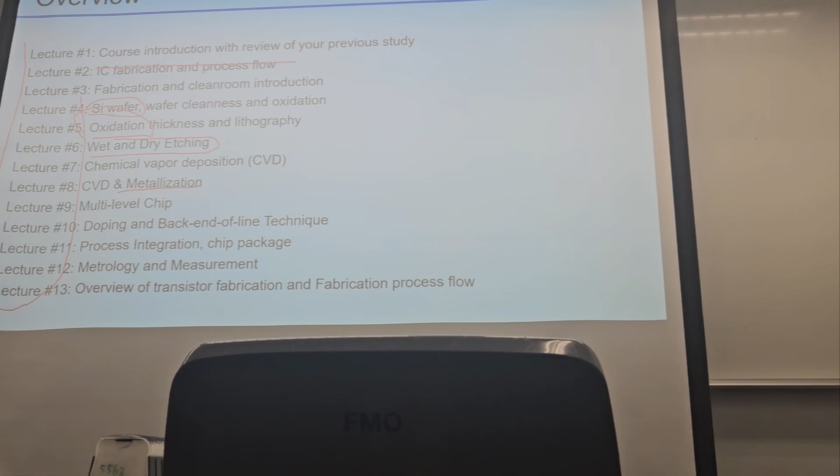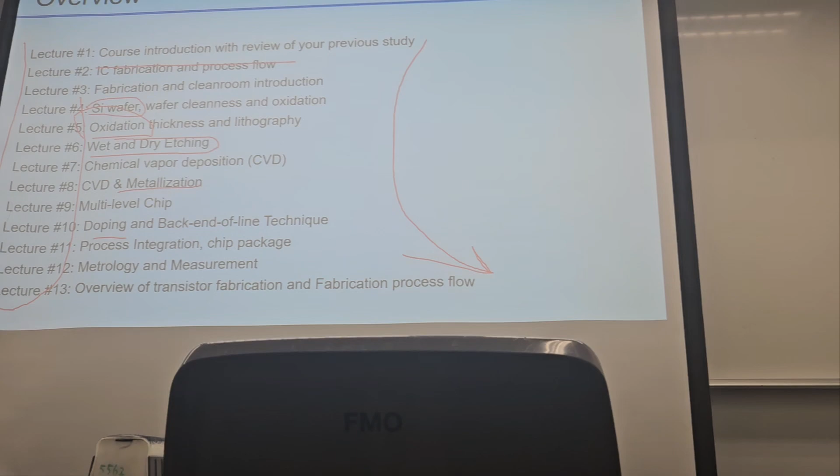We also have questions covering CVD, and yes, we have questions on metallization, multi-level chips, doping, and back end of line technology. So all the items listed here will be covered by the final exam. Okay, so the good thing is that you have sufficient time to prepare for the final exam. I think our final exam should be the last one of the final exams.

It's scheduled on May 29th. I think this is a Tuesday, afternoon from 4:30 p.m. So 2 hours, and the loading actually is not heavy. And room 2464. Before the exam, please check the SIS system to make sure if there's any change of the room. Different from your in-lecture quiz, the final exam will be closed book.

So there are several tips for you to prepare. The first thing is that in these slides, I added all the questions and the corresponding answers of the in-lecture quizzes. So please read and remember all these quizzes. And behind each quiz, you need to understand it and learn the fundamental knowledge. And our final exam will also cover the questions in the lab sheet and also the lecture notes.

It is closed book. You cannot use your laptop, your mobile phone, iPad, or any other equipment. And academic integrity is, I think, the highest priority. You are not junior students, and I believe all of you know about it. And you need to prepare pencils, erasers, and rulers, because you need to draw the cross-section view and also the fabrication process. And if you need, to be honest, I think we do not have complex calculation, but you can bring a simple calculator.

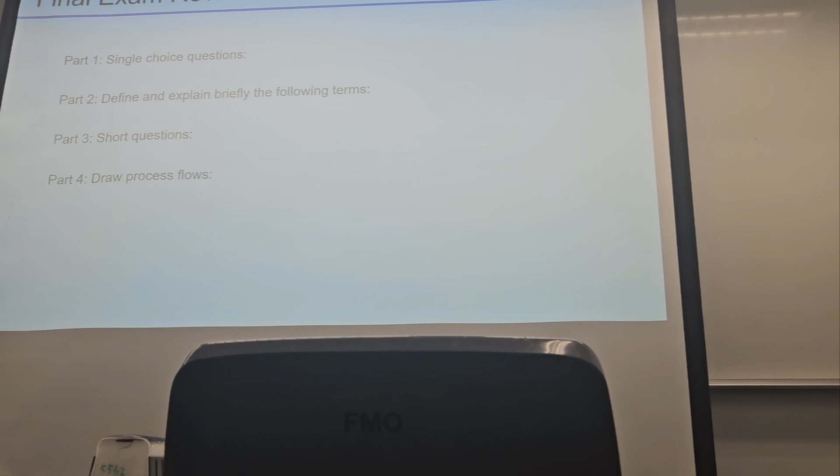Sorry, I think here is wrong. There's no multiple choice in the final exam. Sorry, I will update the slides later. So part 1 is single choice questions, different from your in-lecture quizzes, which have multiple choices. And part 2 is define and explain briefly the following terms. So you need to understand the terms in IC fabrication. You need to remember. Okay, and we also have short questions, which are also very similar to the in-lecture quizzes.

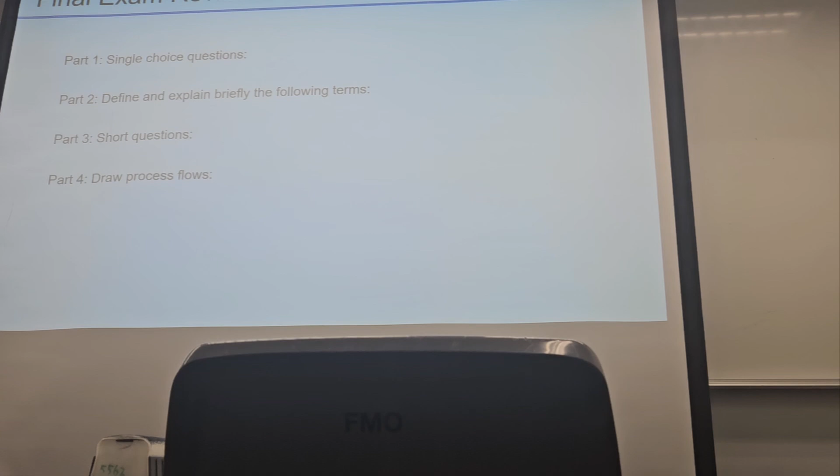And the last part will ask you to draw the process flow, which needs your understanding of IC fabrication, and also you need to understand the top view and the cross section. So I think in lab report 5, most of you misunderstood the cross section.

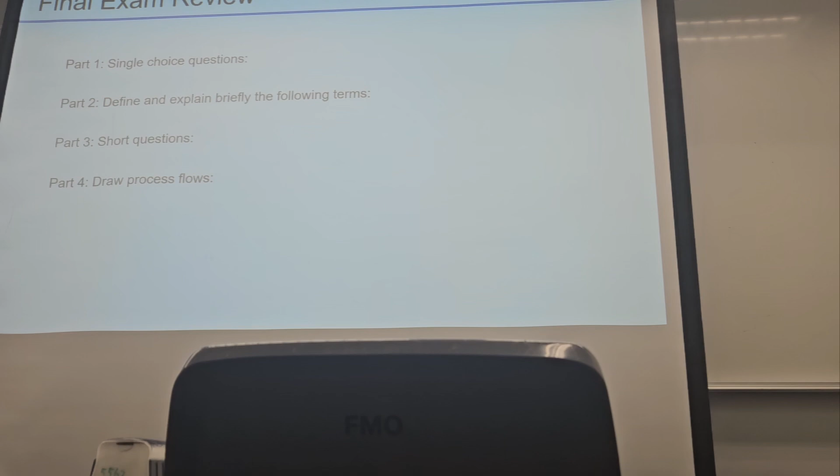Okay, so for part 1, we are going to review the in-lecture quizzes, so you will understand what single choice questions are. So in the following part, we can start from part 2. Okay, and here I think we can do a dry run, right? So here I put the items. You can think about whether you can still wake up your memory or not. Okay, so now you can still check the slides, but in the final exam you need to make sure you remember the details. For example, the first one, what is electromigration?

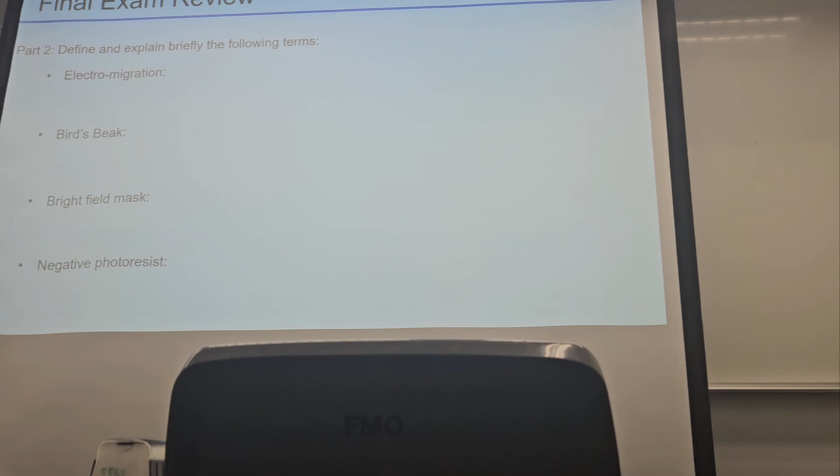For this part, I think we did discuss this in the lecture for the metallization, right? And we also discussed the method to suppress electromigration. Okay. So it is related to the current flow. When metal carries large current density, which refers to the large current flow, the motion of electrons hitting the metal core ions leads to ion motion and causes voids or hillocks.

Well, you do not need to be so professional, but at least you need to write down that under the large current flow or large current density, the atoms of the metal will move from one place to another. Right? You can make the answer simple, but it must match the key point. Okay? So electromigration.

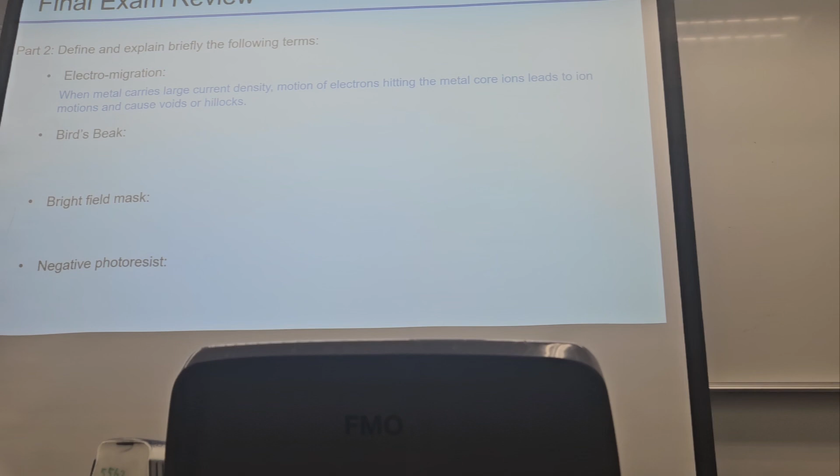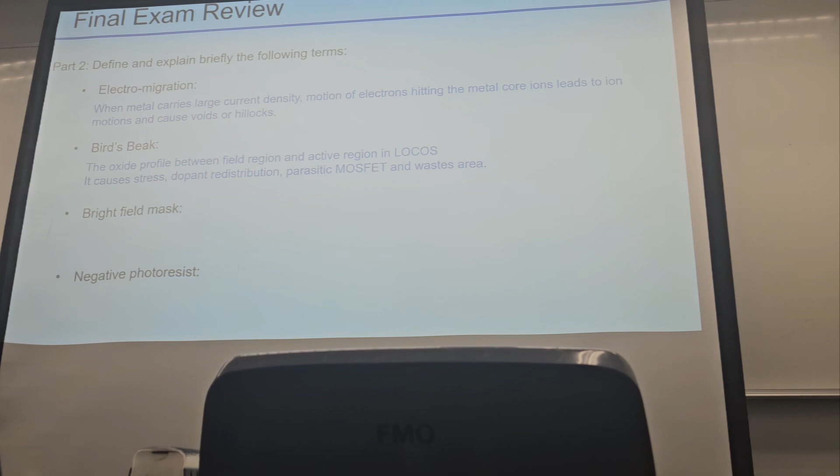The second is bird's beak. I think we discussed this many times in the lecture and also in the lecture quizzes. Right? So what is bird's beak? It is a phenomenon in the oxidation process, right? In the local oxidation of silicon, we need to use the nitride hard mask to protect the area where you do not want to grow silicon dioxide.

So what is the bird's beak? That is the profile, right? The profile of the grown silicon dioxide between the field region and the active region in the local oxidation of silicon. And in part 2, you may also be asked what is LOCOS. You need to understand the following, right? LOCOS is a very professional term in IC fabrication. And definitely you can discuss the drawbacks, the limitations, the issues coming from the fabrication.

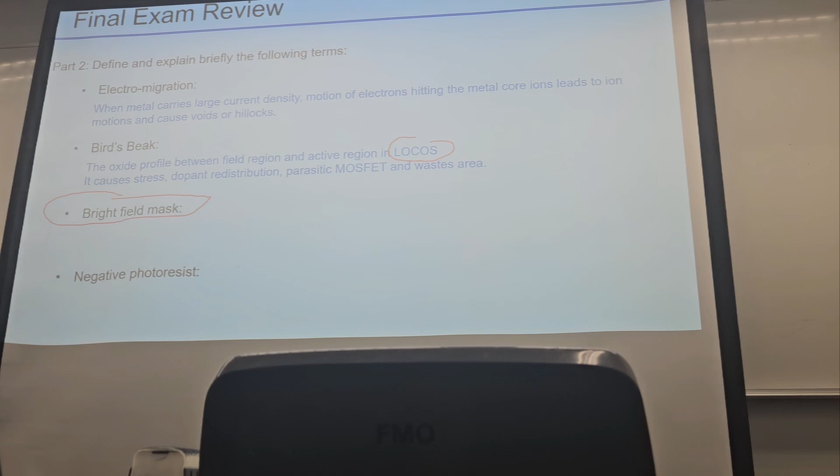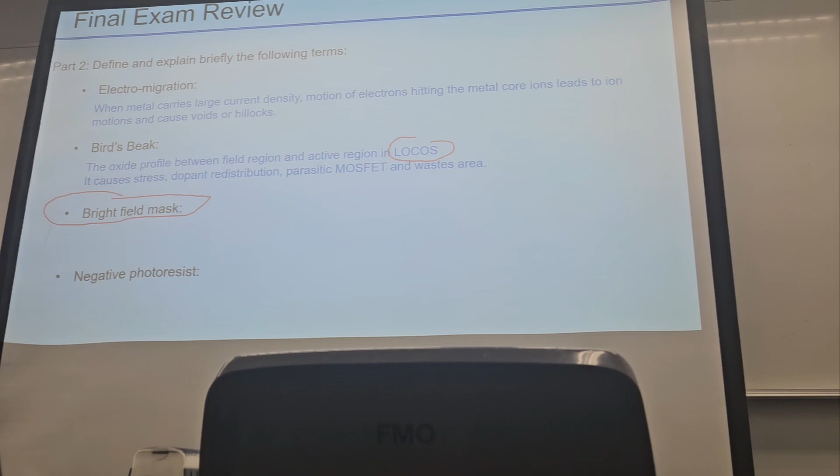Okay? So next, I think part 2 of the final exam will also cover the types of mask. I think more than 50% of you answered the question in the lab report in the wrong way. So you need to understand what is the bright field mask and what is the dark field mask. The field here refers to the area outside the pattern, not the pattern itself. So the bright field mask refers to the type of mask where the patterned regions are non-transparent.

So you can see the opposite situation, right? The transparent and the non-transparent. So for the dark field mask, the patterned regions are transparent, right? They are bright. So I think you need to understand the definition.

And we also discussed types of photoresist. You need to understand the definition or difference between the negative and the positive photoresist. Okay? I can give you half a minute to think about the difference. I think today we want to show you different types of questions. We also want to wake up your memory. We're going to have more than 20 questions, so you need to make sure you can have a quick wake-up of the memory.

Right. For the PR, we have two types, positive and negative. The positive PR refers to the type that, after reacting with the UV light, can be removed by the development. While the negative PR is the opposite, right, after reaction with the UV light it remains on the wafer after the development. So here, the unexposed part will be dissolved or removed during the development, right? And the exposed part remains.

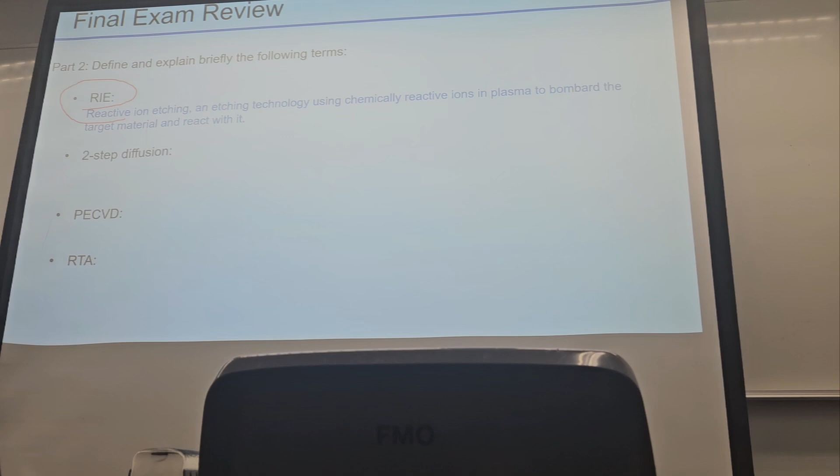Okay, so in addition to RIE, we also have ICP, right? Here, this I is not the ion. This I refers to inductive, okay, inductively coupled plasma.

And we also discussed the two-step diffusion. So when you look at the two-step diffusion, you should wake up your memory that we discussed ion implantation and diffusion. And then you need to understand the difference between diffusion and implantation. Right? Actually, implantation also has several steps. For diffusion, the reason why we have two-step diffusion is because we want to control the amount of dopants, which we have covered in the lecture and also in the lecture quizzes.

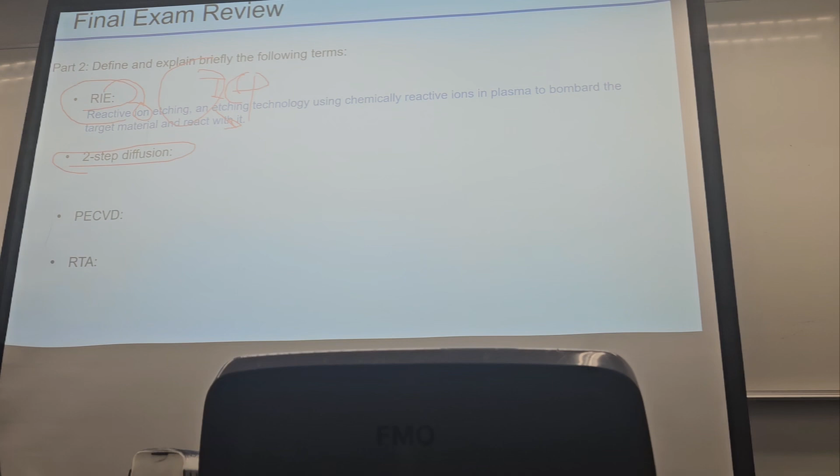So, what is two-step diffusion? We have the pre-deposition to introduce a certain amount of dopant to the top surface of the wafer. And then we have the second step, we call it drive-in, to diffuse a certain amount of dopant into the wafer. Okay, so here I just show you some examples, and also let you understand the difficulty level of the final exam.

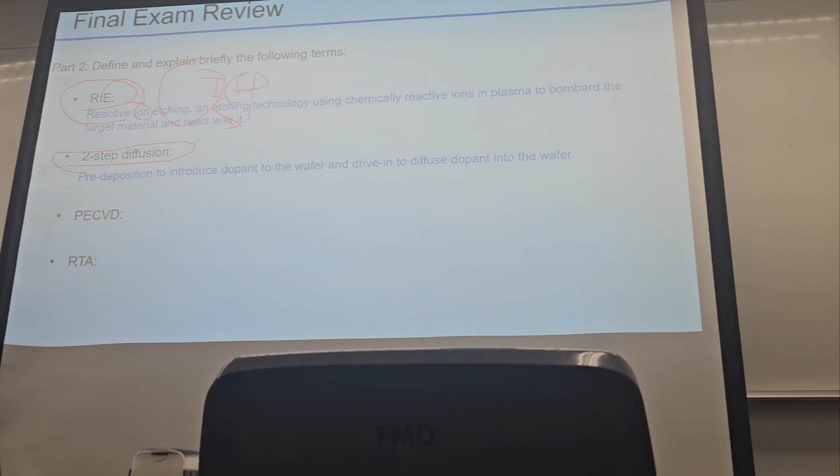So for PECVD, you need to understand the full name of PECVD. In addition to PECVD, we also have LPCVD. So what is PECVD? Think about it. Okay. Try to wake up your memory. You have to try now, then you will understand the effort you need to put into the final exam. Okay.

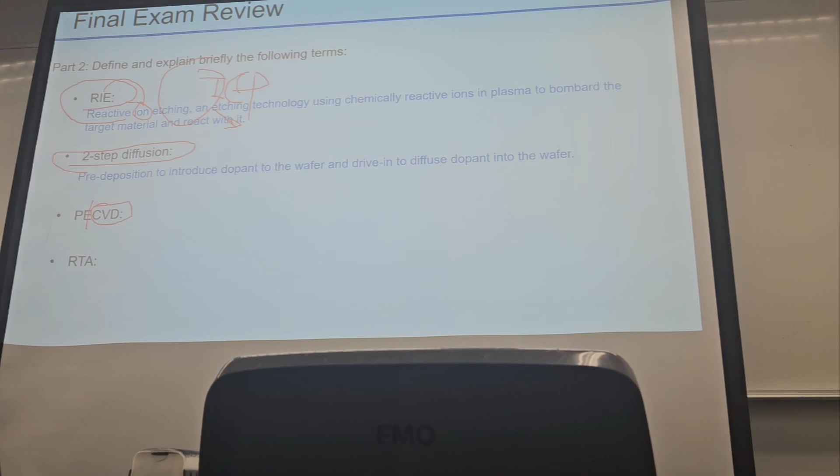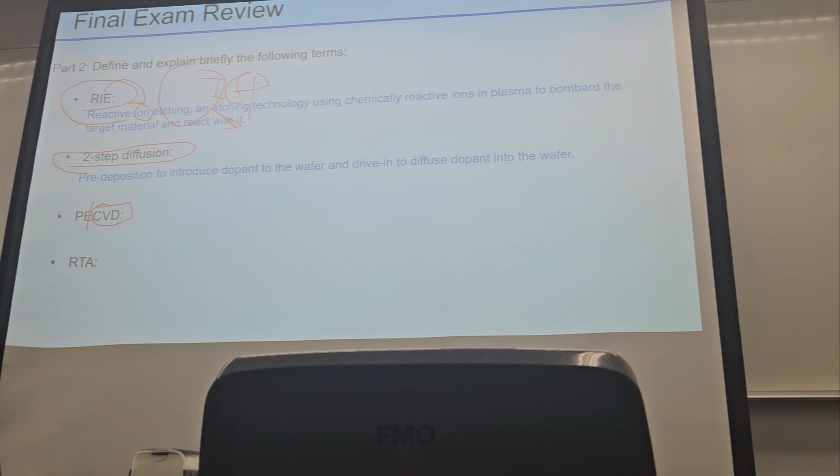So here you can see, then you need to wake up your memory for the CVD, right? And the CVD is for the material growing. So for the material growing, we have different types in addition to the oxidation. For here, you need to understand the difference between oxidation and CVD. Right? Oxidation needs to consume the silicon, while CVD is going to consume the gases without consuming the substrate.

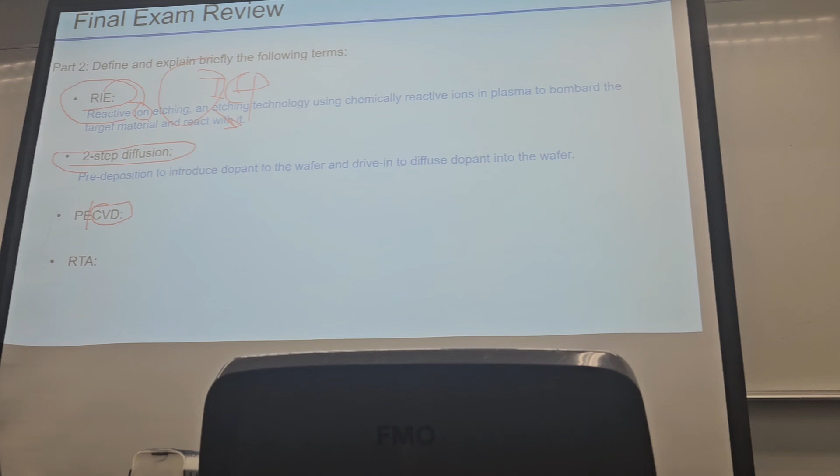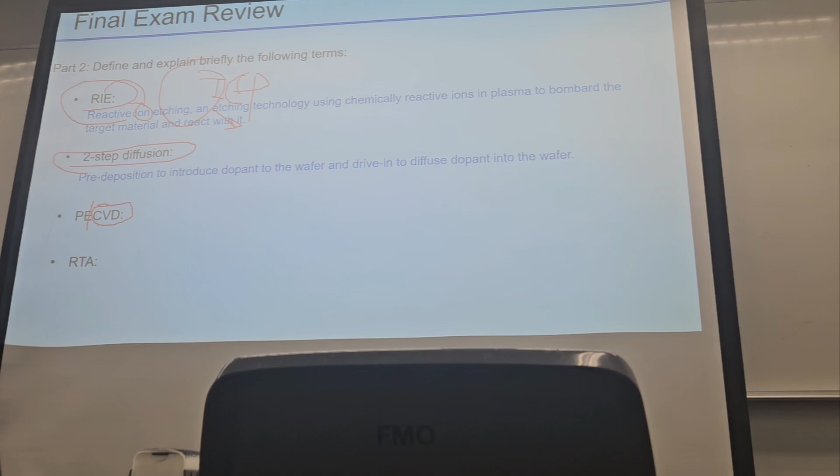So then we have different types under different pressure and temperature. So the PECVD is for the low temperature, below 350 degrees C. Then how to enhance the reaction? We use plasma. So the PE stands for plasma-enhanced CVD. Right? We also have LPCVD, the low pressure CVD, based on the high temperature. When the pressure is low, we need the high temperature to activate, to give the energy, contribute to the reaction.

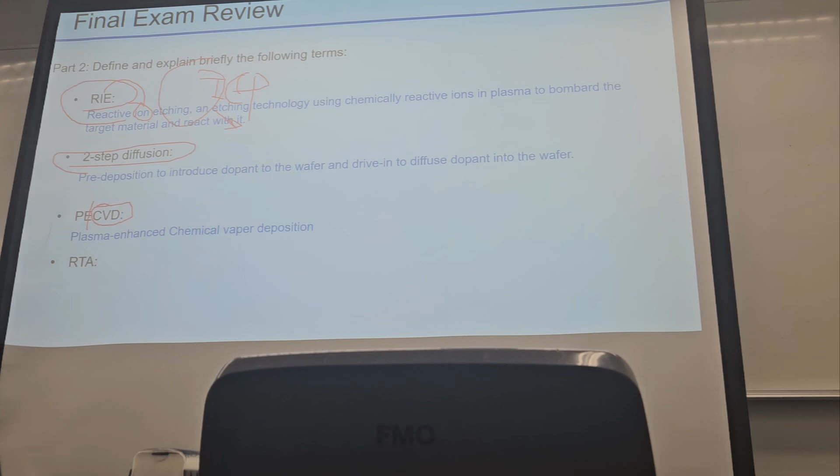Right, so then you need to write down the full name, plasma-enhanced chemical vapor deposition. And we also have discussed RTA, the rapid thermal annealing. So you also need to understand the full name and understand the purpose of this kind of equipment.

Okay, so the silicide. Think about it. What is the silicide? You can wake up your memory around the metallization. Two weeks ago we discussed the silicide. If you cannot wake up your memory, then please read the slides before the final exam.

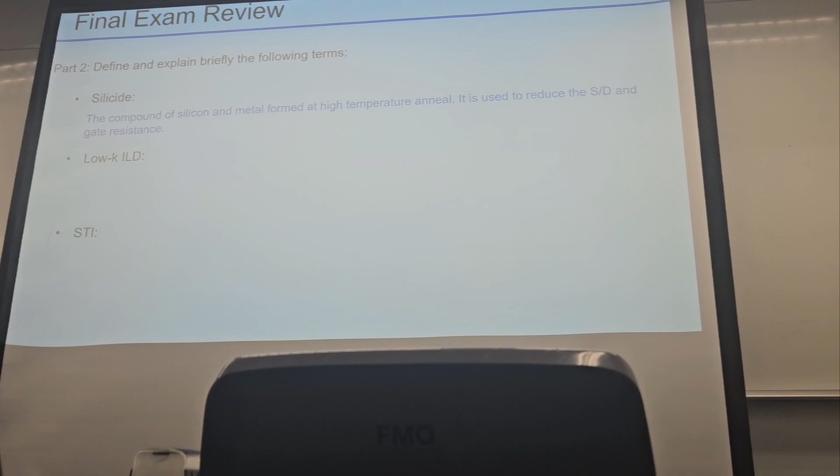So it is a compound of silicon and a metal formed at a high temperature annealing. So it helps to reduce the source and drain and the gate resistance. Okay, and also it can help us to suppress some other negative effects, including the migration. Okay, silicide. I think we discussed this in the lecture for the metallization.

Okay, so what is the low-K ILD? So in the IC fabrication, in the IC devices, you need to understand what is the K. I think we discussed this. The K stands for the dielectric constant. So low K and high K. So what is the dielectric constant? I think you must have learned it in your previous physics courses.

It is used to characterize the capability in storing the energy. So in other words, the dielectric constant can help you to calculate the capacitance of a certain structure. Right? So if we have a capacitor, top and bottom electrodes, with the material inside, the material between the two metals will help you to determine the capacitance of this capacitor. The same situation in IC fabrication, right? Or in the IC transistor devices.

In the transistor, we have multiple electrodes, right, to form the source, the drain, and the gate terminals. And these electrodes can form the capacitor, giving the capacitance, working as parasitic branches in the equivalent circuit. So if we can decrease the dielectric constant of the capacitor, we can decrease the capacitance, and then decrease the parasitic effect. Okay? So here, the low dielectric constant in the interlevel dielectric.

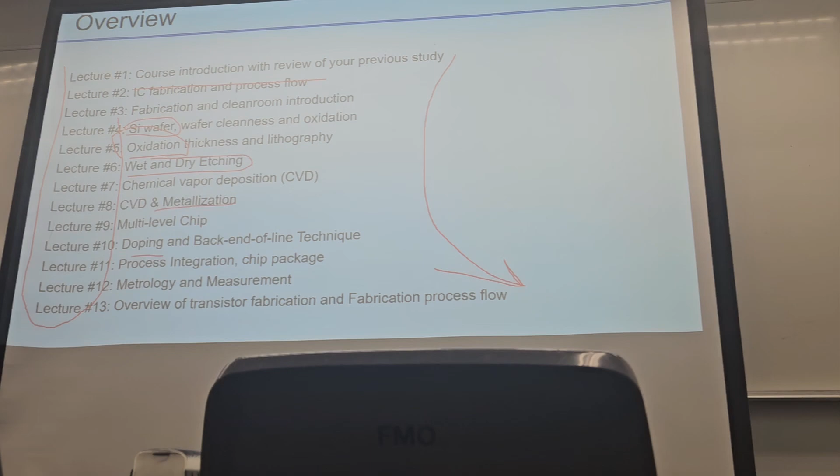Okay, so this is part 2, and you can see that all these terms are covered by the topics listed here. So please go through the slides before the final exam. I think 1 week should be sufficient for you to read all the slides. After 2 weeks, you may forget what you learned on the first day. Okay, so 1 week should be sufficient.

Okay, so is part 2 the definition questions? Yes, the definition questions. Give me a word to explain. Yes, correct. To be honest, there are not too many terms there. We have how many lectures? 13 lectures, right? Each lecture maybe 2 or 3 terms. And you can do the summary.

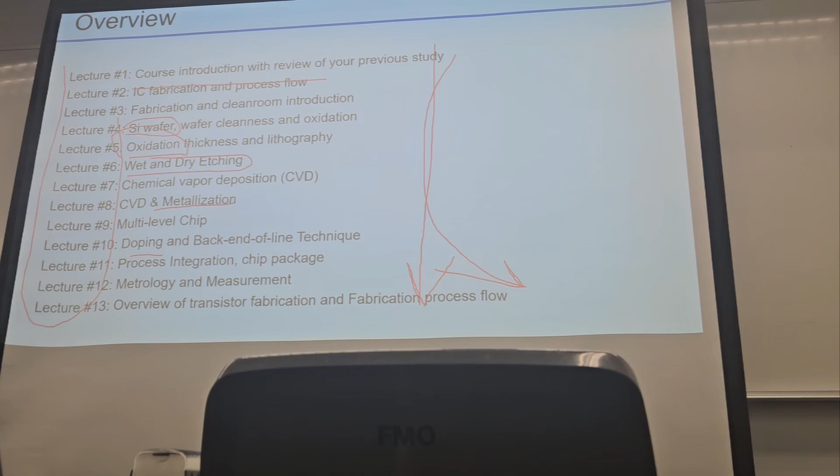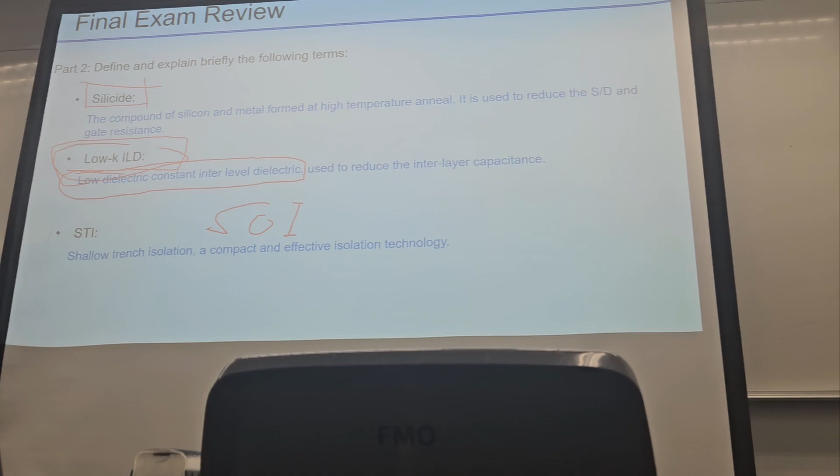It's very important to remember these terms after learning the IC fabrication. Otherwise, in the communication, there are too many words without these terms. We only have to briefly describe the function? Yes, in 1 or 2 sentences. Or if it is so hard for you to explain the full name, for example STI, you know it is for isolation, but you cannot remember what the S stands for. Then you can say, okay, this isolation method uses the trench or the etching method to create isolation between traces. You also can get the point.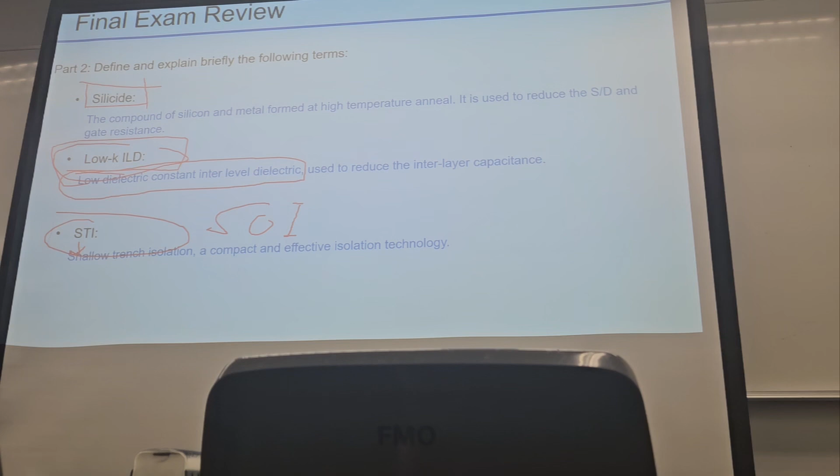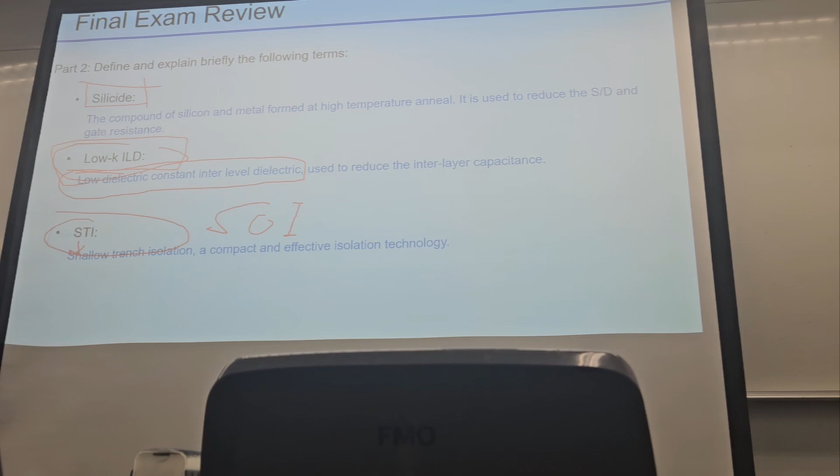Is the answer written in the PowerPoint enough for us to write in the real exam? Is this number of sentences fine for us to write in the exam to get full marks? If you can provide related information, you can get partial points. For example, if you forget the shallow trench, then you can say this is a compact and effective isolation technology. Then you can also get points. Okay.

Okay, so part 3 is based on short questions, right? So it's not to explain the terms, but to answer some questions. For example, the traditional question is to understand the doping type and orientation of the top surface. I think we have covered this, right? So I give you half a minute to wake up your memory. I guess none of you can remember. In the lecture we have the table. So before the final exam, you need to remember that table.

For example, the first one has 2 flats, right? The 2 flats with an orientation difference of 90 degrees. So this refers to P type and 100 orientation. For the P type, there are two different orientations that we have learned. One is 100, another is 111. So the third one is also P type, orientation 111. Without the minor flat, that will be 111. With the minor flat at 90 degrees to the major flat, it will be 100.

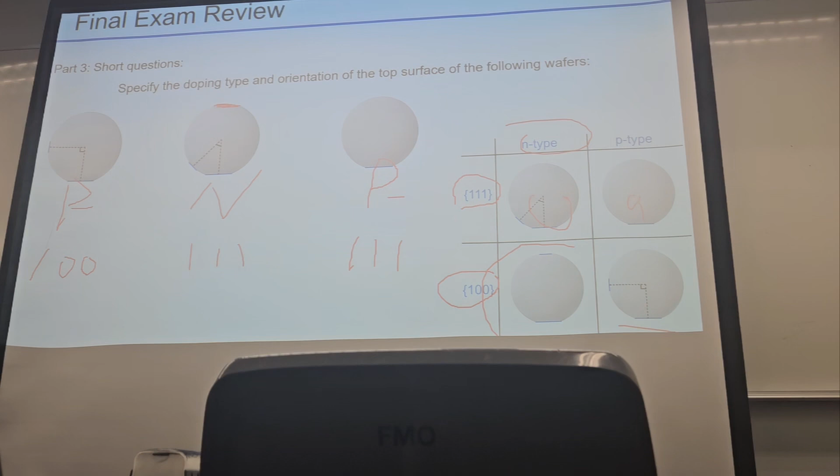For example, a short question: list 3 methods to deposit metal on the wafer surface. For this part, you can check the methods in metallization. How many do we have? We have sputtering, evaporation, and electroplating. Electroplating is very common for the upper layers where a very thick metal is needed. Sputtering and evaporation are useful for metal thickness less than 500 nanometers. For thicker ones, you need electroplating. Please go back to check the details in the slides.

You also need to understand what epitaxy is. I think it's related to CVD; we discussed epitaxy when discussing CVD technologies. There is a difference between epitaxy and non-epitaxy. Epitaxy refers to growing single crystal material on a single crystal substrate. I think we have a definition in the slides.

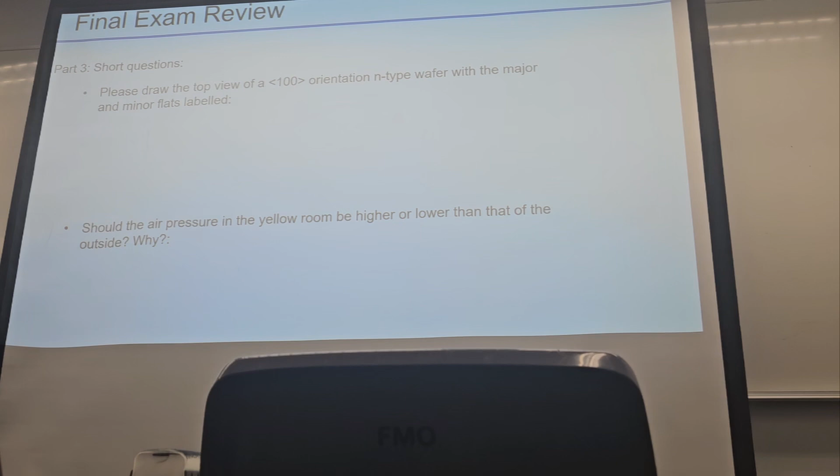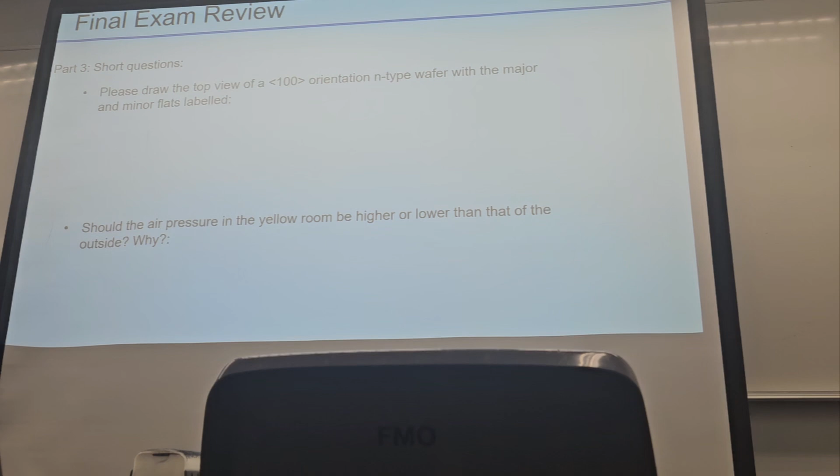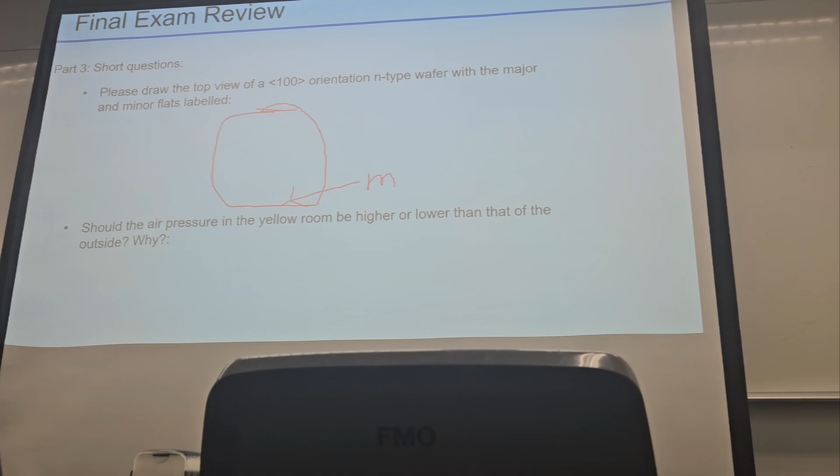I think we have discussed that the N-type features the larger orientation, right? And 100 also features the larger. Then the orientation difference would be 180. So, right. I understand the drawing sometimes is hard, so it's better for you to do the notation. This is the major flat, and this is the minor flat.

Yeah. Yes, we have the picture. Okay, so you need to label. You need to label the location and the size of the flat.

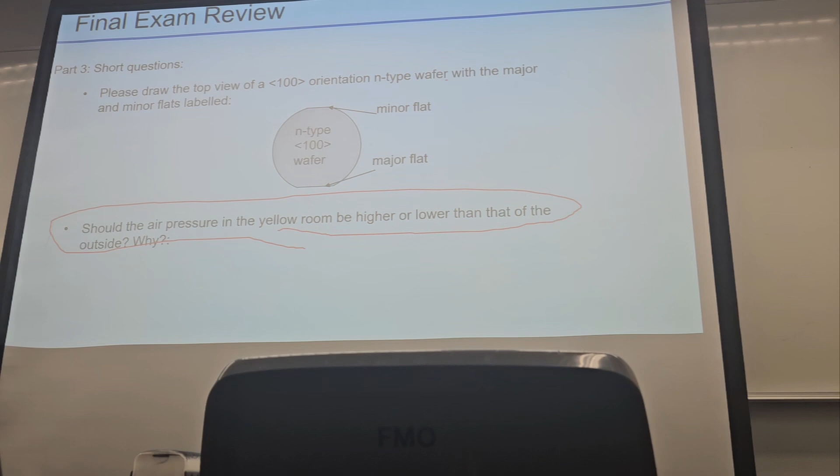So should the air pressure in the yellow room... Okay, so this question is related to the clean room. Definitely will be covered in the final exam. Should the air pressure in the yellow room be higher or lower than that of the outside? So this question is related to the design of the clean room, related to the air pressure and related to the airflow.

So the yellow room, we also have discussed different levels, right? What is the function of the yellow room? Why do we need the yellow room? I think you have visited phase 2. You can see that in phase 2, the yellow room is inside of the white room. And we also have discussed why we need the yellow room. Right? It's photolithography. It can help us to protect the PR.

In other words, the PR, before the exposure, cannot be opened in the white room. The white light will have a reaction with the PR. So the yellow room is photolithography, and it features a higher cleanness level. So in our phase 2, the yellow room is class 100, while the white room is class 1000. And outside the white room is a gowning room for you to change clothes. The level is 10,000.

So then let's return back to the question. Should the air pressure in the yellow room be higher or lower than that of the outside? Should be higher, right? Because we want the airflow from the high level clean room to the lower level clean room. So we need a higher pressure in the high level, the yellow room, to make sure that the contamination cannot flow from the white room to the yellow room.

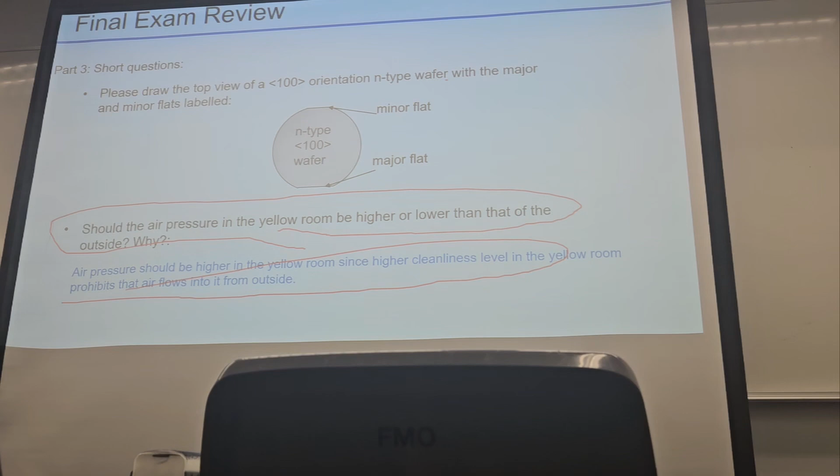Straightforward. So the next question, what is the origin of the interface states between the silicon and the silicon dioxide, and how to reduce the density of it? Think about it. I think we discussed this in the oxidation. We also have discussed a method to fix or to rearrange the interface between the silicon and the silicon dioxide.

So it is due to the incompatible atom arrangement at the interface, like some covalent bonds are incomplete. And we also have discussed the annealing, right? The high temperature annealing.

So for this part, I think you can go back to check the slides for CVD. We also did the comparison between CVD and oxidation. For oxidation, the interface quality is better than CVD. And we also discussed the method to improve the interface quality.

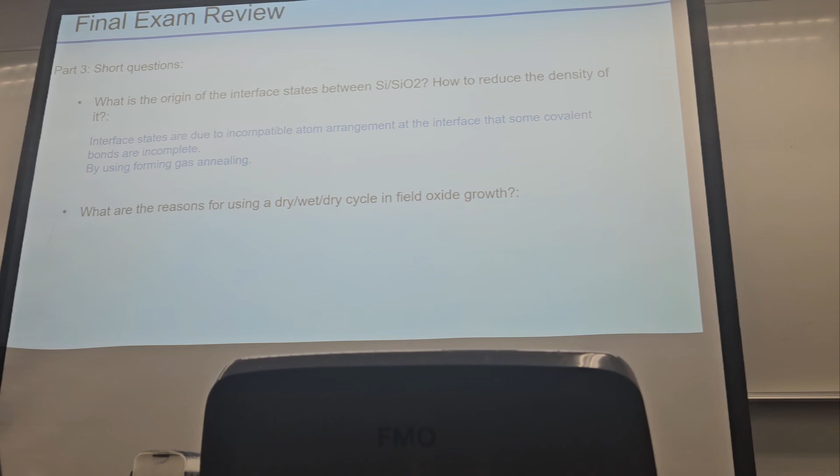Okay, so I think in the lecture we discussed the difference between dry and wet oxidation, right? So the dry oxidation can give us good quality, not only the interface between the silicon dioxide and silicon, but also the top surface. Because the dry oxidation is slower, right?

And in the lecture we showed you the picture comparing the top surface roughness versus the growth rate. So the lower growth rate can give you smaller surface roughness. So that's the reason why at the beginning and at the end we have the dry oxidation.

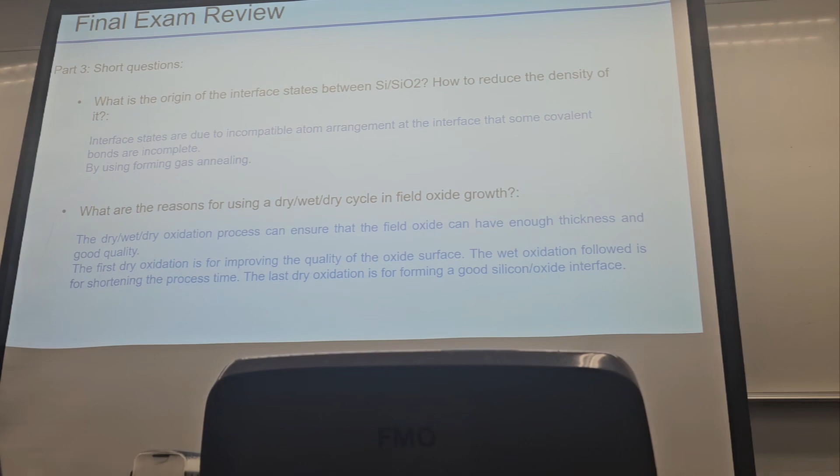Let me repeat, the dry oxidation can give us good quality between the silicon and the silicon dioxide. And we begin with dry oxidation to improve the surface roughness. But for dry oxidation, the oxidation speed is too slow. So that's the reason why in the middle we need the wet oxidation to help us shorten the process time. Okay, so you can go back to the slides to see the details.

Okay, we also have questions related to your fabrication. I think some of you have misunderstood this ruler in the lab report. So in the lab part, we used the I-line for the lithography. And I think we discussed the different lines, right? The G line, the I line, the different wavelengths of the UV light. So what is the wavelength of the I line?

Okay, I think this is a little bit hard question. If you do not do lithography many times, you may not remember the wavelengths. Okay, so that's the reason why.

Okay, because some of you are late, let me repeat the policy. The total available mark will be 120, but based on my experience, no one can reach the 120. Yeah, because I do not expect you to remember all the details, the actual full mark is 100. So if I get maybe 101, then I get 100, right?

You'll get 100. Yes. No, you don't need to answer everything. Yes, no bonus. So that's the reason why I said one week of preparation should be sufficient. Maybe over one week you can get 110 or 120 is possible. So it's out of 100. Yes. You can control, right? After you make sure you get 100, then you can leave.

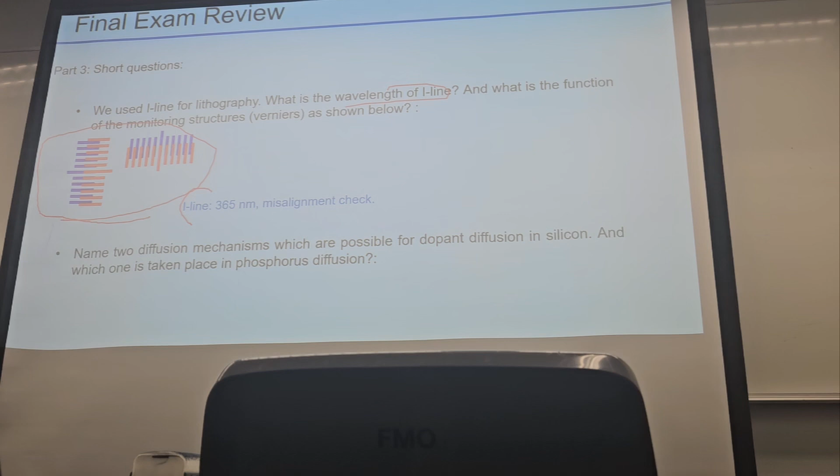Okay. Yeah, because I know that some questions are a little bit hard, and I do not expect you to remember all the details. Okay. So what is the wavelength of I-line? Is there any multiple choice? No multiple choices. So I'm going to update the slide. I think I wrote down the wrong policy here. Okay, single choice, no multiple choice.

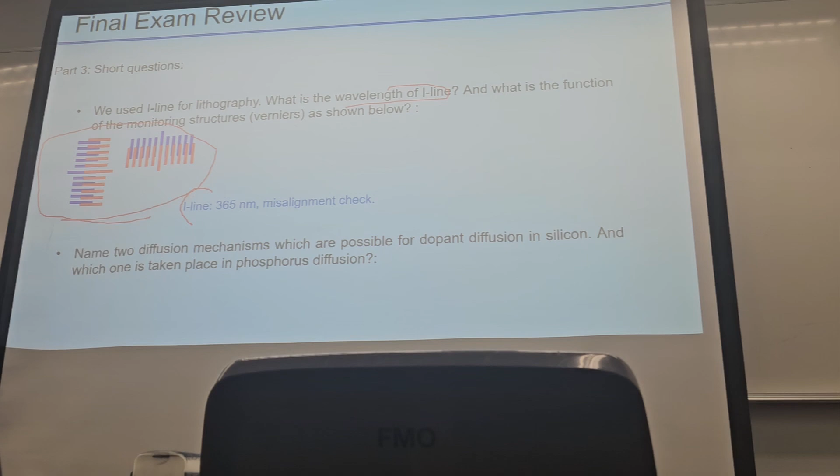Okay, so it is 365 nanometers. And these are for the misalignment check, but they are not used for the alignment. In the lab report, some of you said these are used for the alignment. No, we have the cross marker during the alignment to help you align during the exposure, and these rulers are used after the development to check the misalignment. In the lecture I also explained how to read the misalignment. These two rulers, vertical direction and lateral direction, help us read the misalignment in two directions, right?

So we have the number here, and if the rectangle at a certain value is perfectly aligned, then the misalignment will be that value. For example, here is 4. Sorry, let me check which part. Okay, this is 2, and this is 0. It seems these two are aligned in the middle, so the misalignment would be 1 micrometer.

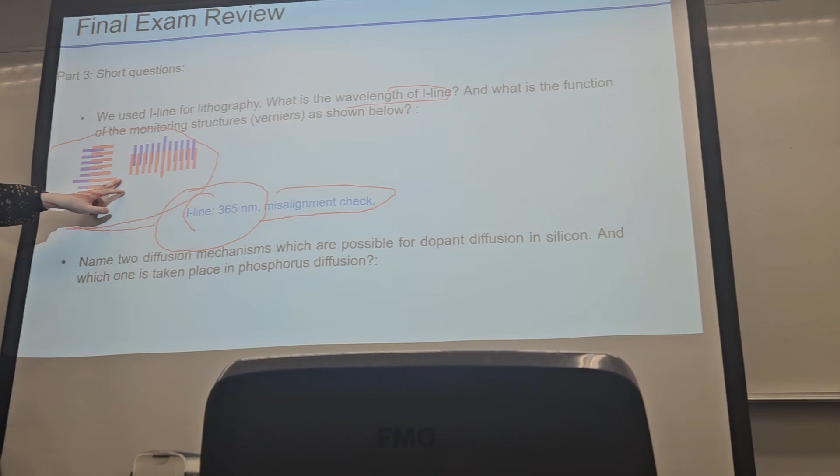And for here, well, it's hard to say. I think here it's hard to read the misalignment. This is 0, slight misalignment, right? And here we have a misalignment larger than this one, and here is 2. So we can guess a rough misalignment here is like 0.5 micrometer in the vertical direction. Okay.

Let me check. I think I have a good example for you. Maybe last week we discussed one part. Let me check. Sorry, let me.

Okay, so I think we discussed this last time, and we are also going to have similar questions in your final exam. I give you several cases, and from the cases you need to know how to read out the misalignment. The misalignment reading is based on the overlapping. For example, here we have the overlapping under the 0, which means the vertical misalignment is 0. We can read it directly. And here, the same as the vertical one, we get the perfect overlapping under the 0.

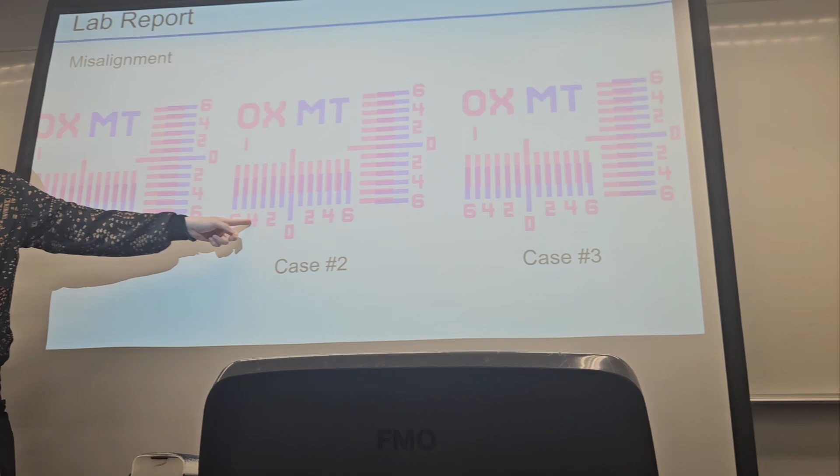There is no misalignment. While for case 2, for the lateral one, we check which rectangular blocks achieve the perfect alignment. We think it's this one, right? This one achieves almost perfect overlapping, and under it the number is 4. So the lateral misalignment is 4 micrometers. For here, it's still 0.

For the right one, we also can read it, right? Try to find the perfect overlapping. Here it seems it's this one, the vertical one, so the misalignment is 6. For the lateral one, it seems it's this one, so the misalignment is 1 micrometer. This 2 is 0, then this is 1. Okay, so we will have similar questions in the final exam.

Okay, so the next short question. There are two diffusion mechanisms which are possible for diffusion in silicon, and which one is taking place in the phosphorus diffusion? So yeah, we have two types, right? This is also a hard question. I expect maybe 10% of students can answer this.

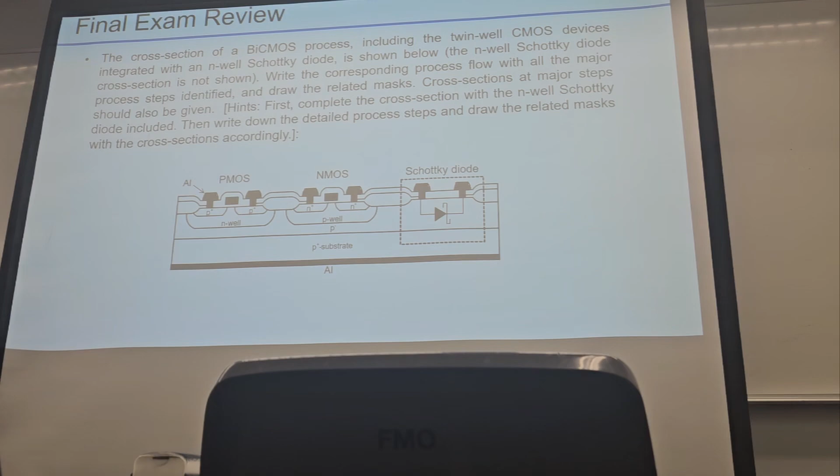The next one will be based on some fabrication process flow related to the overview of the MOSFET. So let's see this question. I'll give you 1 minute to understand it. This also needs some basic knowledge from 3500. I think at the beginning, in the first 2 or 3 weeks, we discussed the fabrication process flow of the diodes, the NMOS, the PMOS. Think about it. The last part of the final exam is the process flow; you can have a try. So I'll give you another 1 minute to have a try.

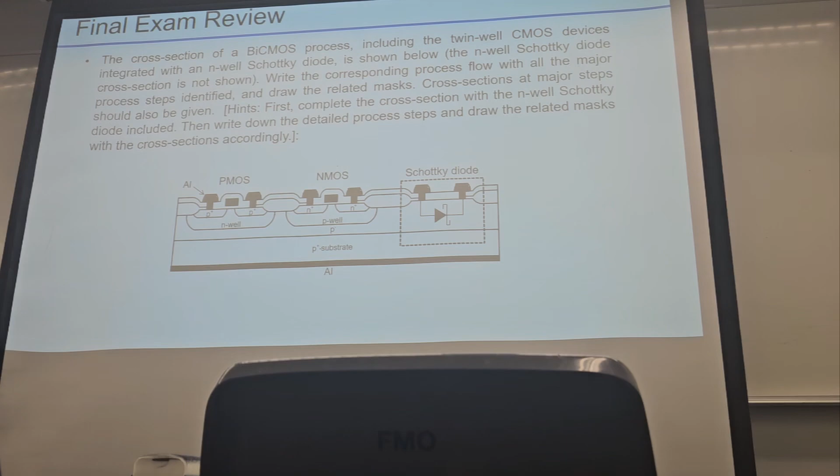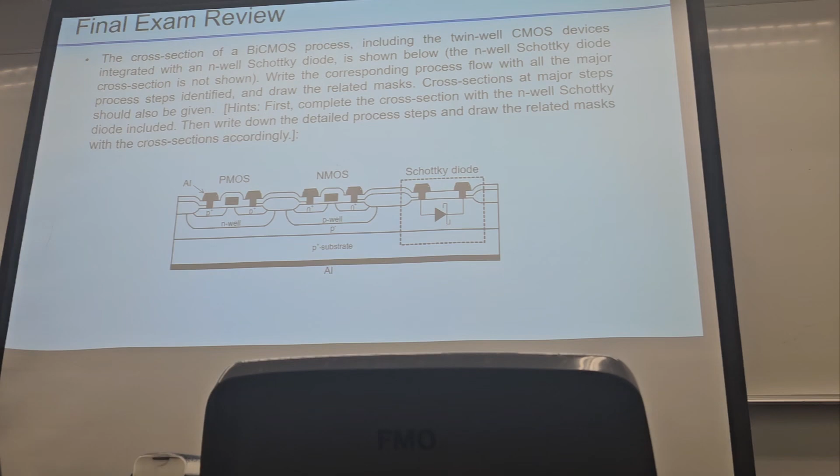Okay, so here, to answer this question, you need the basic knowledge from 3500. You need to understand what an N-well Schottky diode is, right? It's a type of Schottky diode that is integrated into a standard CMOS process. What is CMOS? The complementary metal oxide semiconductor. And the N-well Schottky diode uses the existing N-well region of the semiconductor substrate. So you need to have the N-well.

And for the structure of the fabrication of the N-well Schottky diode, you can refer to the NMOS and PMOS. In a typical CMOS process, the N-well is a region where the N-type dopant, like phosphorus, is diffused. What is the N-well? The N-well is a region where the N-type dopant is diffused into a P-type substrate. So this is P-type. You need to have a P-type substrate first, and then diffuse the N-type dopant to form the N-well, right?

So you can get information from the PMOS. That's the reason why in this question we put the PMOS and NMOS cross-section view here. And the N-well Schottky diode uses this N-well as one of the electrodes, because it is not the MOS structure, right? It's a 2-terminal structure, not a 3-terminal structure.

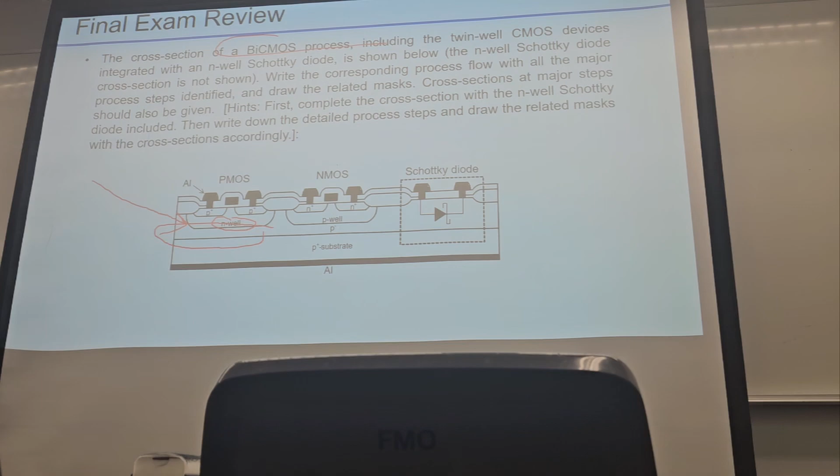So the key component of the Schottky diode is the metal-semiconductor junction formed between a metal and the semiconductor N-well. Okay, so that is the diode. So again, the N-well can work as one of the electrodes. So then you just need another electrode and a semiconductor region to form the junction. You can fabricate the diode.

Okay, so we also put the hint here. Because the question asks you to refer to the PMOS and NMOS to draw the fabrication process flow for the N-well Schottky diode. So before drawing the fabrication process flow, you need to understand the final structure of the N-well Schottky diode.

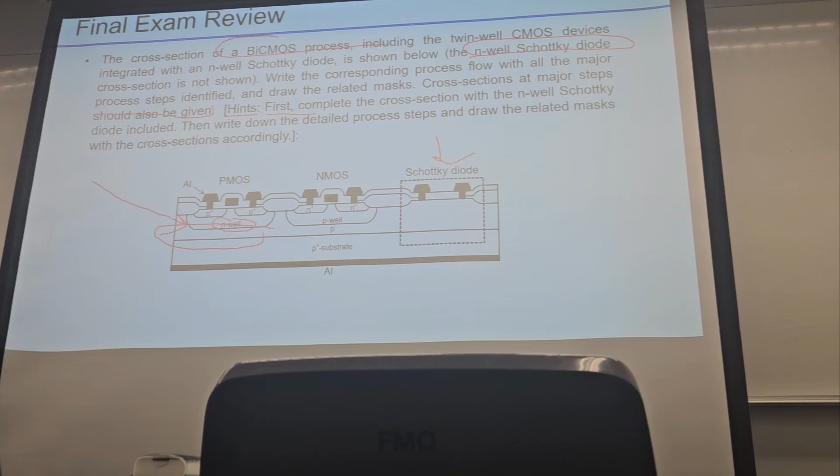Okay, so this is the Schottky diode. This is N-well, and also two terminals. As the understanding of the N-well Schottky diode, we know that the N-well is connected to one terminal, right? That's the reason why there's only one junction. Okay, so we can choose this one as a terminal connected to the N-well.

And we already have the P substrate here. So we create the N-well. Okay, this is N-well. You can learn from the PMOS. And this N-well connects with one terminal. So then the diode. What is a diode? Simple junction, right? So we need to create a junction between these two electrodes. This is for the N-well, and this is for the other region, which means we just need to create

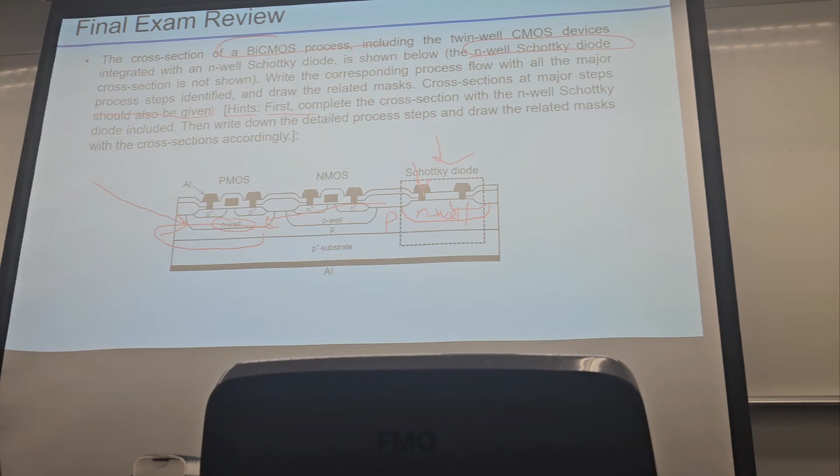another region here. Okay, so then the question: this should be p-type or n-type? I think you need to think about it. Because it's different from the MOS. So maybe some of you are already seeing the slides, right? So it should be the N plus, okay, which is different from the MOS.

Okay, so here you can see that the doping ratio is actually a relative value. So for the N-well Schottky diode, it uses a different doping level to form the junction, to get turn on and turn off in different current flow directions.

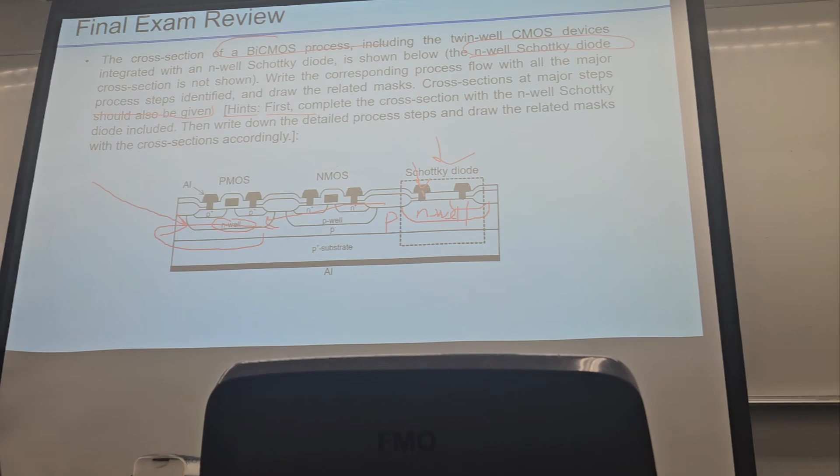Okay, so I can tell you the final exam question will be easier than this one, because this needs some knowledge from 3500. Okay, so let's see the answer. So the first step, you need to understand the structure of the Schottky diode.

In the N-well, we need another doped region with a different density, which is N plus, right? To form the junction, then the two terminals can work as a diode. And the Schottky diode is also different from the other types of diode, right? That's the reason why it needs an N plus inside the N-well, not a P region in the N-well.

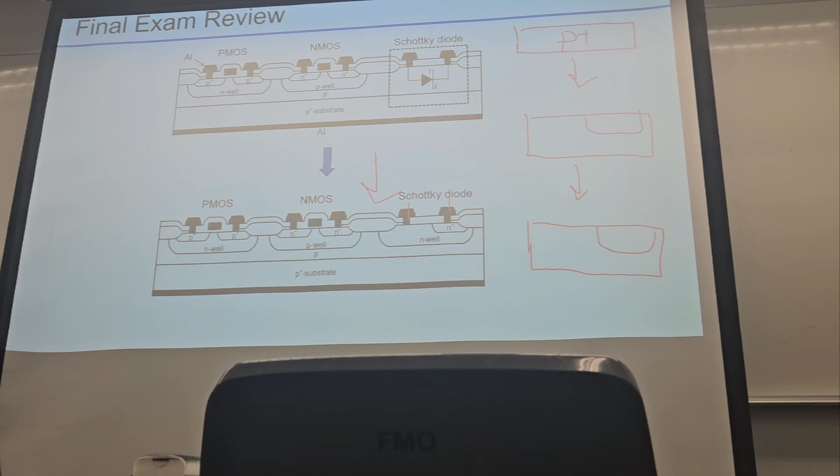Okay, so after getting this structure, the next step is to draw the fabrication process flow, which we have discussed in previous lectures. So first, you need to draw the cross-section view of the P-type substrate. Then the next step, you draw the cross-section view where you create the N-well. And then, in the N-well, you create the N plus region.

And then you need to define the top electrode, okay? So this is a rough idea, but then you need to fill in the sub-steps, for example, from the P-type substrate, how to get the N-well. This is based on diffusion or implantation. Then we need the mask here to protect the undoped region. How to do that? We need silicon dioxide, right?

The same here. From the N-well, we need to build another N plus region, so we also need the mask here. Okay, so for the fabrication process flow, my suggestion is to first finalize the structure, then put it in different major steps, and between major steps, add in the minor steps, the sub-steps, to show the process.

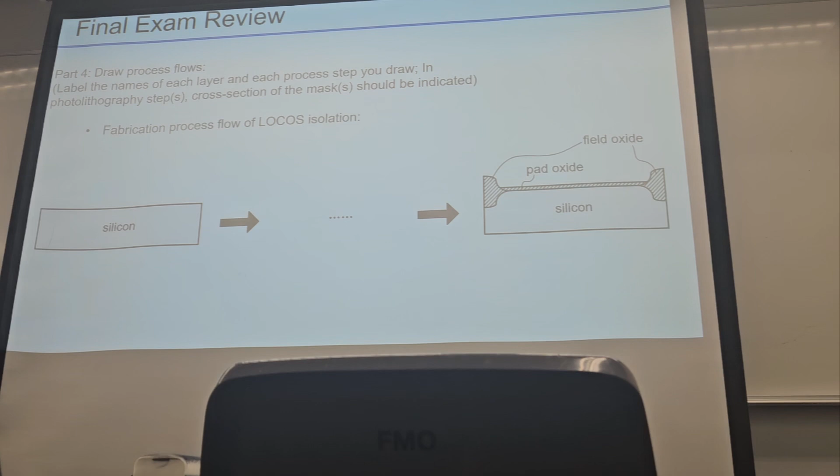So let's see the process. Draw the process flows. First step, you need to get the mask, the mask for the diffusion. You need to show the fabrication process. Sorry, this is another question, right? Yeah, another question. Okay, so I did not put the... draw it like this, vertical.